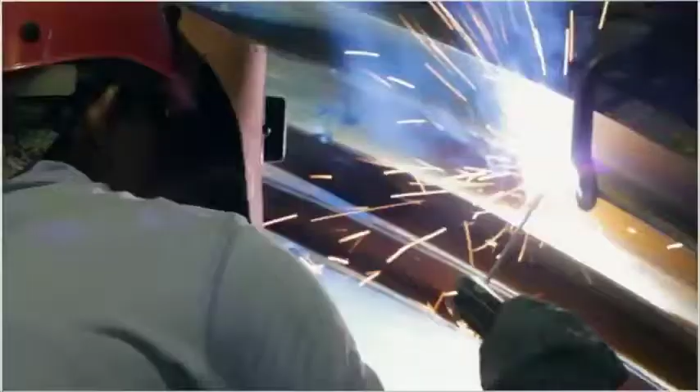Our vision is to be a leading sustainable solution provider to Malaysia's essential natural resources: water, mineral and energy. ALN Dynamics Sendirian Berhad is a Johor-based company and provides a full range of services for water supply development, including collector wells, riverbank filtration systems (RBF), surface water intakes, hydrogeological investigations, water resource management, aquifer recharge wells, and complete design-build turnkey construction.

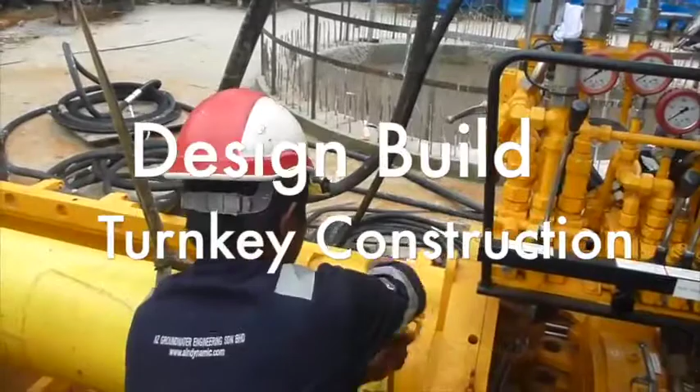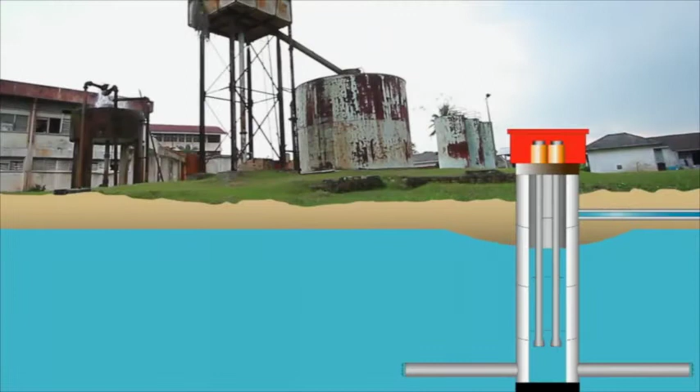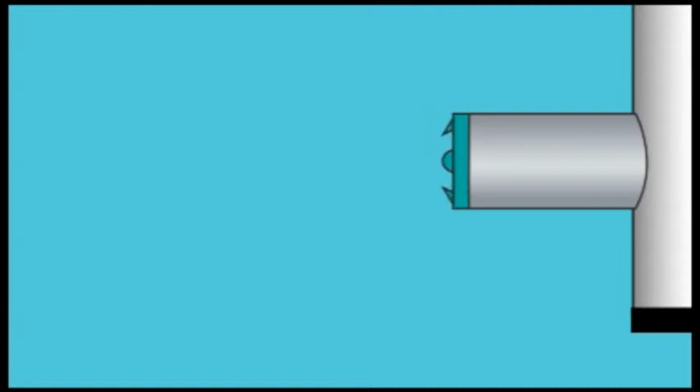The collector well is constructed with a reinforced concrete caisson that serves as a wet well pumping station. Horizontal well screens are installed near the bottom of the aquifer, resulting in high yield capacities that can range from 1/2 million litres per day to 20 million litres per day from a single well. Let's hear from someone who operates the company ALN Dynamics Sendirian Berhad, or ADSB, who run the collector wells.

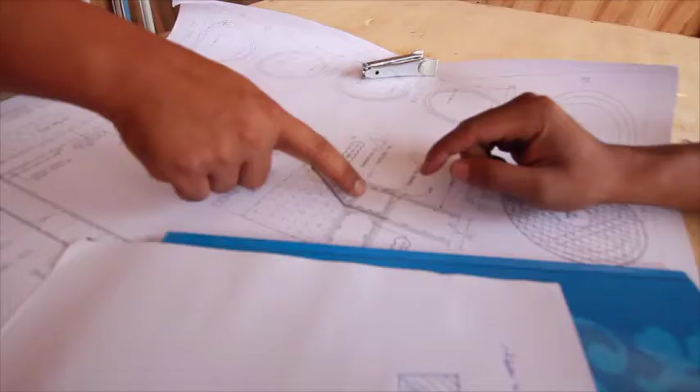Whether you need an ocean of water, naturally filtered water, or something in between, ALN Dynamics Sendirian Berhad, also known as ADSB, can produce the supply you require from whatever source is available. ADSB specializes in design and turnkey construction of high-capacity water supply systems, including horizontal collector wells, surface water intakes, and riverbank filtration. From the initial consultation and evaluation to construction, our experienced teams will create the most cost-effective and efficient system to deliver water in the quantity and quality needed.

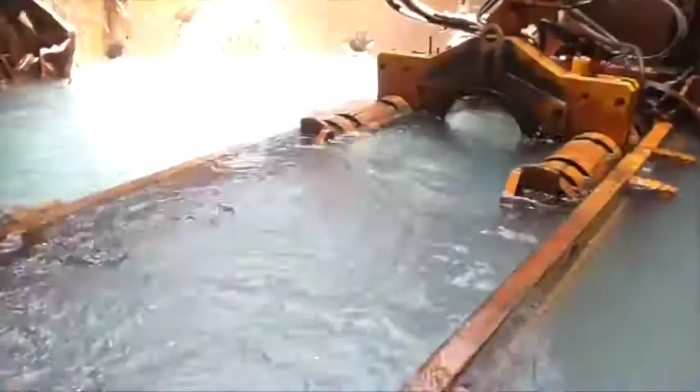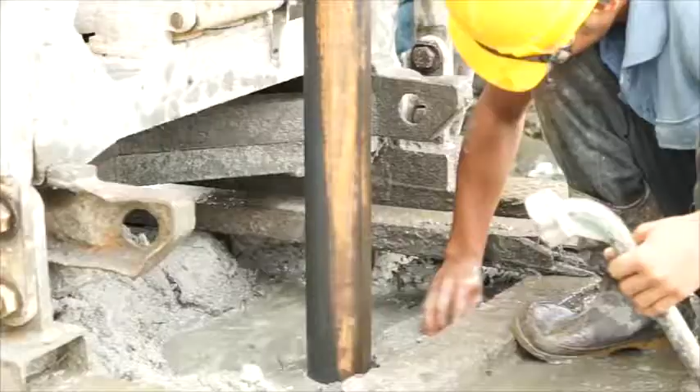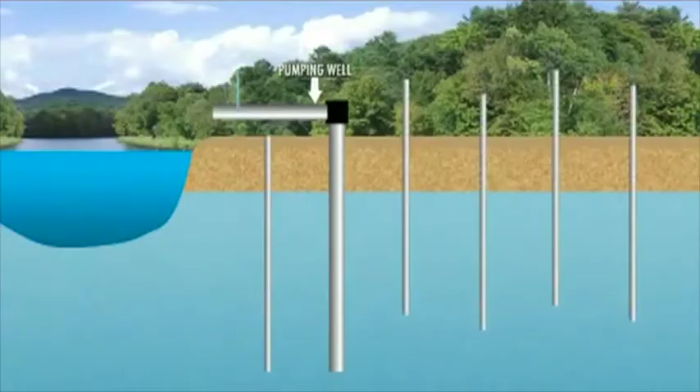Now let's take a look at the actual construction of a collector well by ADSB. After a potential site is selected, ADSB geologists conduct a complete hydrogeological investigation. Samples of aquifer materials are obtained from the drilled boreholes. After the evaluation of the borehole samples, a test well and a series of observation wells are drilled and constructed. During the pumping test of the test well, ADSB can observe the effects on the water table at each of the observation wells. The pumping test data will be analyzed to determine the hydraulic properties of the aquifer.

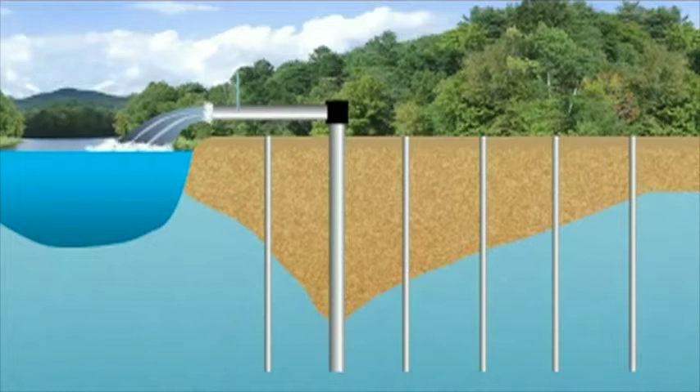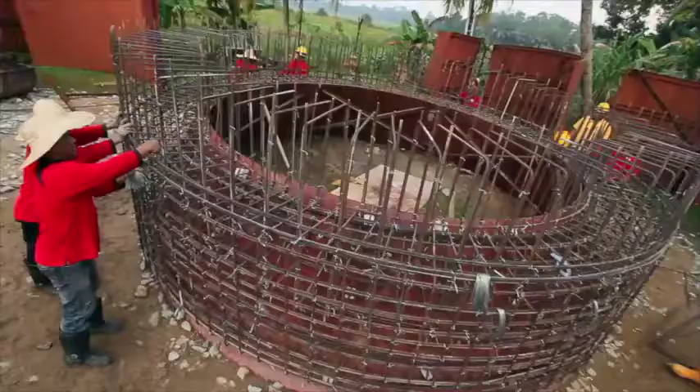A course of concrete is poured. A steel cutting shoe was constructed in the first section of the concrete caisson to assist in the sinking process. The concrete walls are reinforced with steel rebars, which are woven and tied before the concrete is poured. This process will be completed on each succeeding section of caisson. Next, the workers install concrete around the outside of the caisson to form a dead mat, which will aid in the sinking of the caisson.

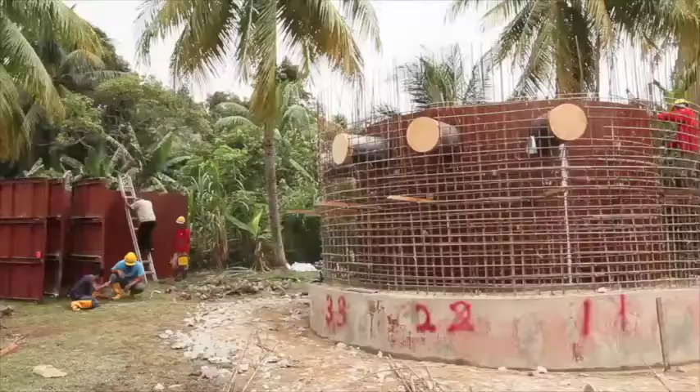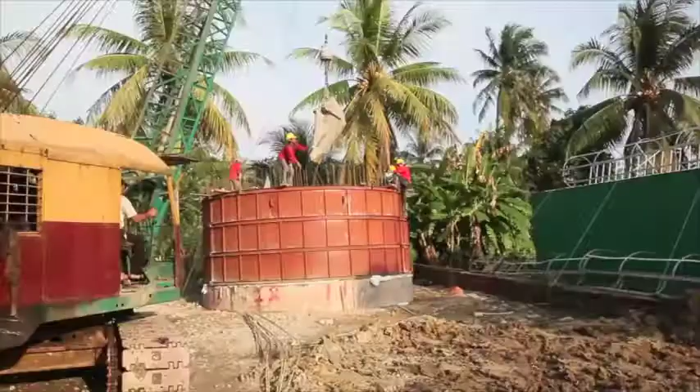Here we see the completed cutting shoe. As the workmen continue to tie the steel rebar, note that port assemblies are already installed in this section of caisson. These port assemblies are the locations where the horizontal laterals will be projected through the caisson and into the surrounding aquifer. The outer form is positioned and the concrete is poured. This well has a 15-foot diameter and 100-foot depth. Where larger yields are required, the well diameter will increase to accommodate larger pumps and motors.

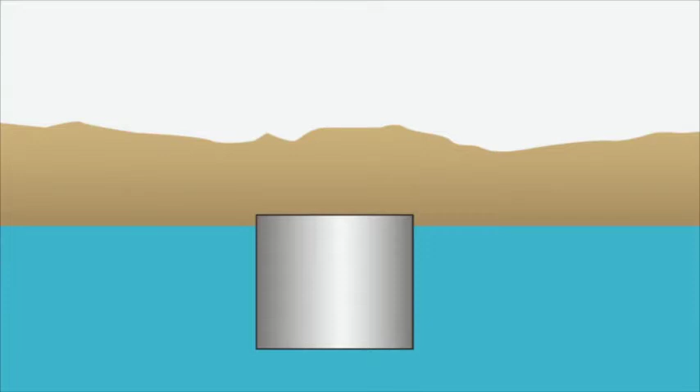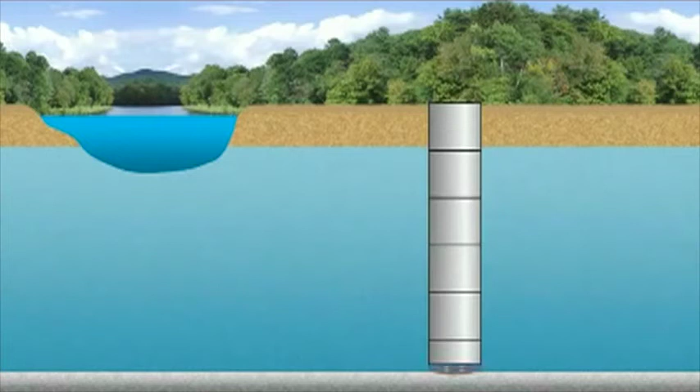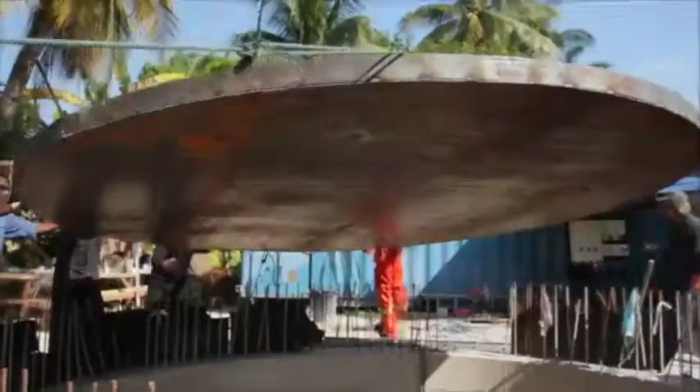Construction continues in this manner until the top of each section of caisson reaches the ground level. At that time, the next section of caisson is constructed as the process continues. When all sections of the caisson are sunk to the required well depth, a concrete well plug or seal is placed in the bottom. After the specified measurement, the base plate is constructed. If the hydrostatic head is great, the plug will be reinforced with steel beams and base plate.

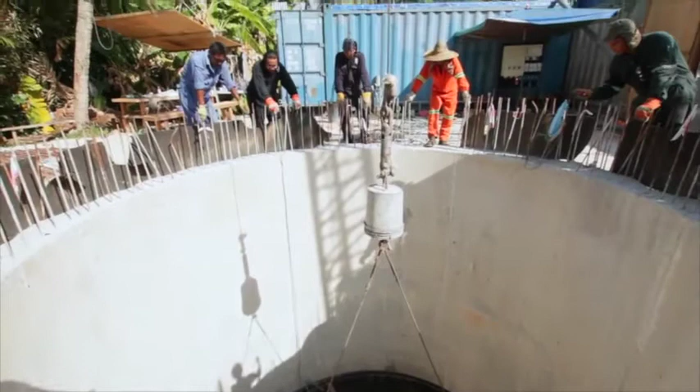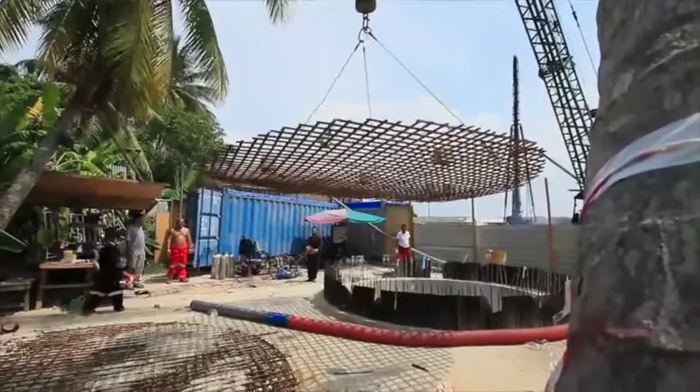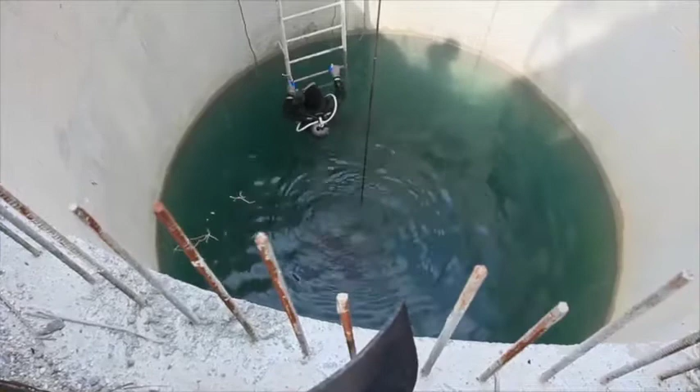Shown here, a professional diver is assisting in the inspection at the bottom, prior to the concrete and beam placement. Divers drill holes around the caisson wall to fit the bolt nuts between the base plate shoe and caisson wall. At this stage, the first steel bars are sunk in, followed by the second steel bars. After the second steel bars are sunk in, the diver will do the final check before concrete is poured. The diver shows the condition of the lateral openings for holes number 1 to 6.

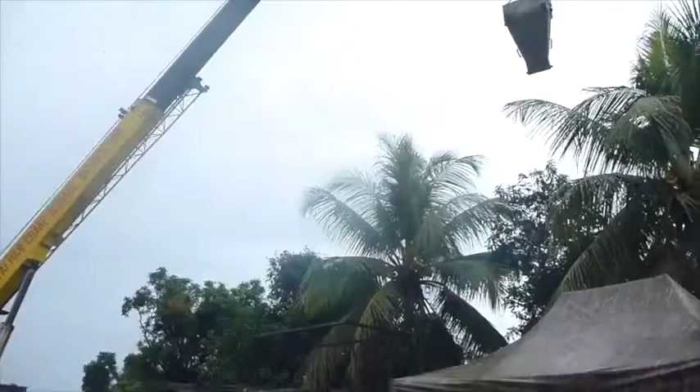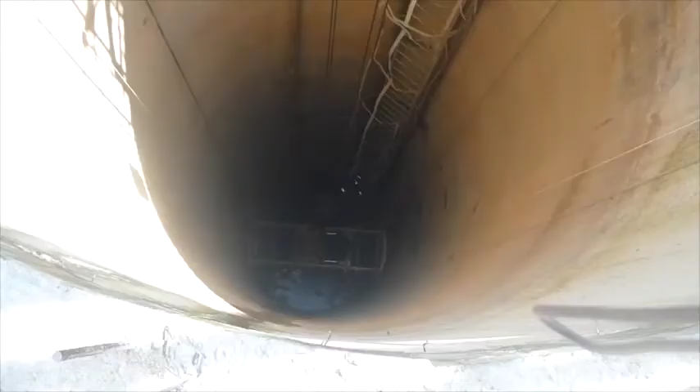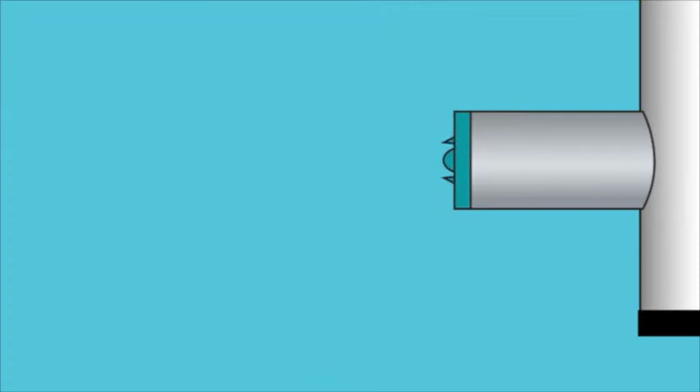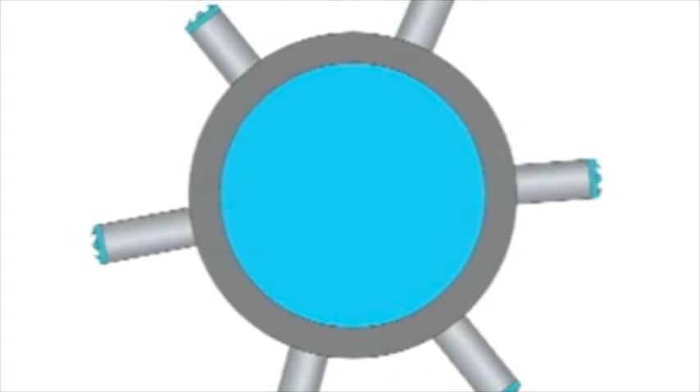A special pipe called a tremie pipe is positioned in the center and lowered into the well. A funnel is placed at the top of the pipe, while concrete is poured through the pipe and into the bottom of the well to create the plug or bottom seal. The next construction steps are the installation of the horizontal lateral screens. Horizontal laterals are quite simply the water-collecting wings that stretch out into the sand and gravel aquifer. As shown here, horizontal laterals greatly increase the efficiency of groundwater abstraction as they are extended into the water-bearing aquifer in all horizontal directions. For example, laterals can be up to 100 meters in length or longer.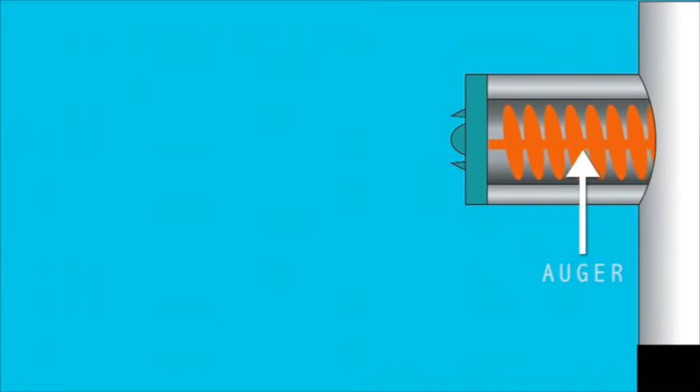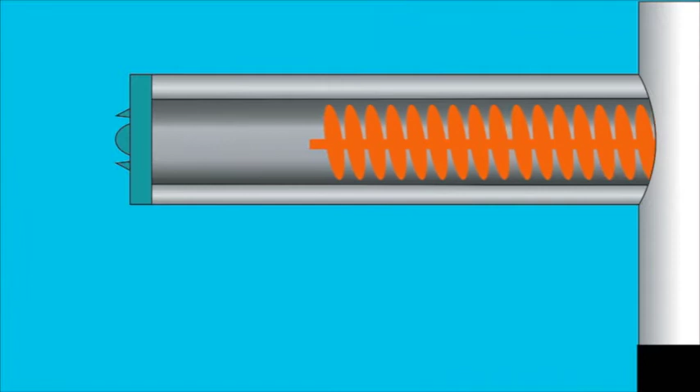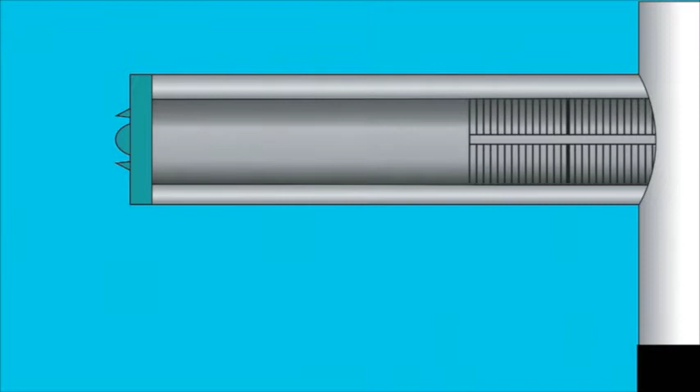Let's take a look at the construction of the horizontal laterals. A smaller line, called a sand line, is contained within the temporary casing. This line is connected to the cutting head and auger and is used to carry sand and gravel into the caisson. Soil samples are collected and evaluated for proper screen slot size selection. Once the temporary casing is in the proper position, the sand line is removed and the workmen begin the process of well screen installation. As this continues, larger particles of gravel are repositioned against the temporary casing, forming a natural yet permeable full-length filter pack around the pipe to prevent clogging.

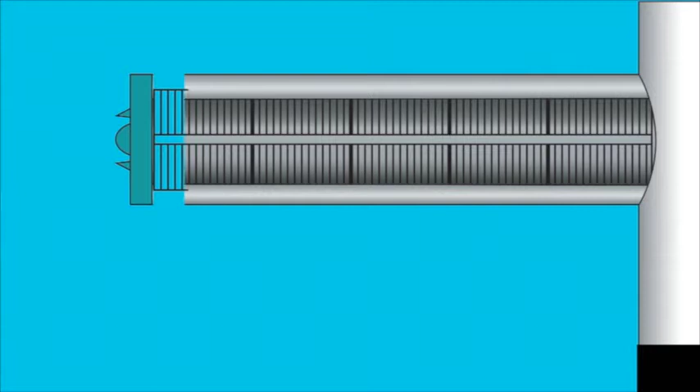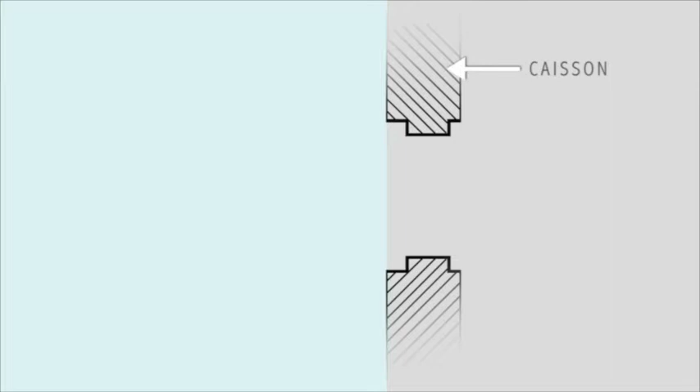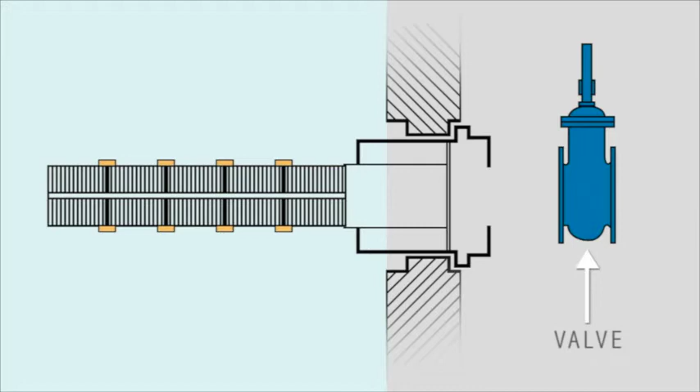Once final lateral length is achieved, the sand line is removed and the screen is installed. The temporary casing is then removed to expose the screen, and the sand line is reinstalled to remove any remaining fine sand during the screen development process. When completed, the sand line is removed, allowing water to flow freely into the caisson. Then, a pumping test is performed to confirm projections of well yield and drawdown. The final step involves the construction of a pump house, necessary pumping equipment, and water transmission lines. Water valves are opened and the well is ready for operation. The result is a complete pumping system contained in a single unit.

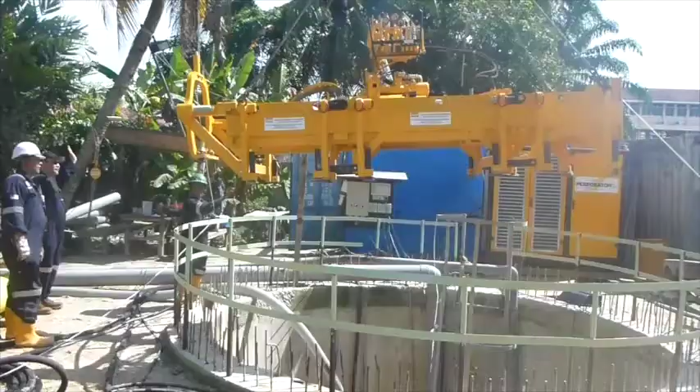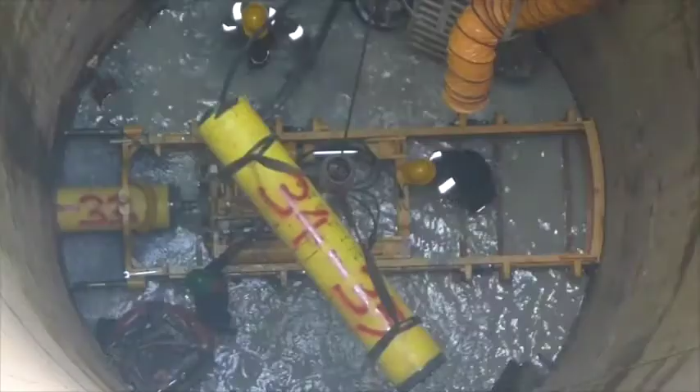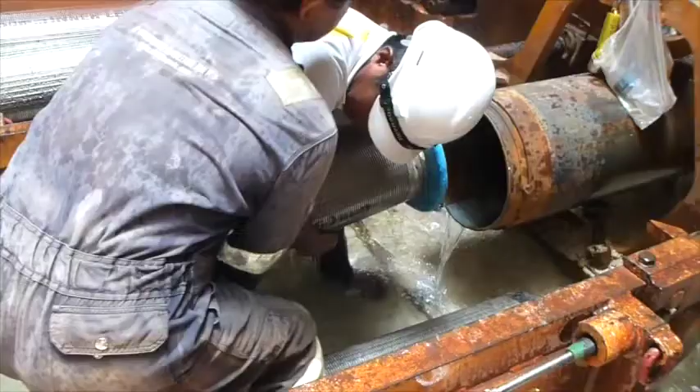Shown here are sections of the temporary casing that are safely lowered into the work area below and positioned for insertion into the lateral port using a specially designed pre-packed screen. The screen pipe is placed one section at a time into the temporary casing. Each consecutive section of pipe is secured to the one already in place. The process of adding screen pipe continues until the predetermined length is reached. Once all sections of the screen pipe are in place, workmen will begin removing the temporary casing to expose the screen to the aquifer deposits.

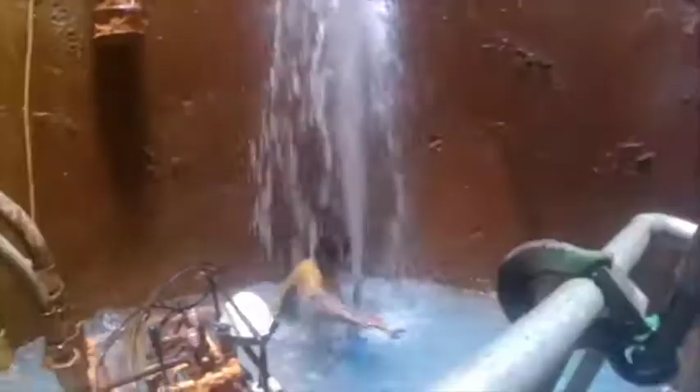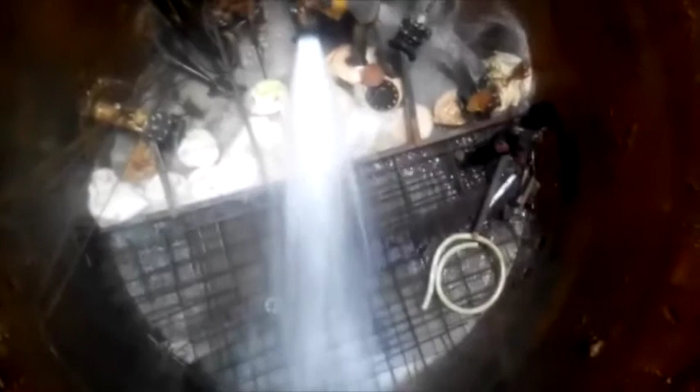Hydrostatic pressure forces water, sand and smaller gravel through the screen pipe and into the caisson. This process flushes the lateral of sediment. High-pressure water jetting is also utilized in the screen development process and is shown by the blue pressure hose. This jetting agitates the smaller sand and gravel around the screen and flushes the lateral of sediment.